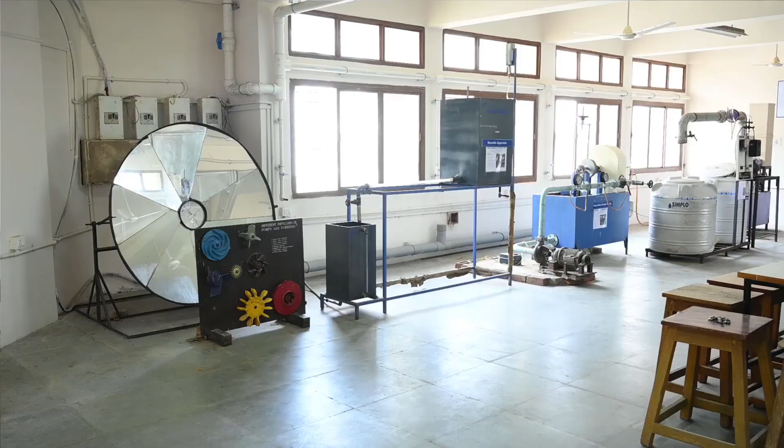This lab works in conjunction with the theory course offered in the 4th semester of Fluid Mechanics and Hydraulic Machines. In the academic years 2017-18 and 18-19, 2 separate subjects were offered to cover the fundamental aspect as well as the application aspect of fluid mechanics and hydraulic machines. In the 4th semester, the fluid mechanics subject was offered, whereas in the 5th semester the application part was covered in fluid power engineering.

Hello everyone, myself Professor P.R. Panchal, Assistant Professor at Mechanical Engineering Department in GEC Modasa. Welcome to the Laboratory of Automobile Engineering. This laboratory is equipped with various types of mechanisms which are used in automobiles.

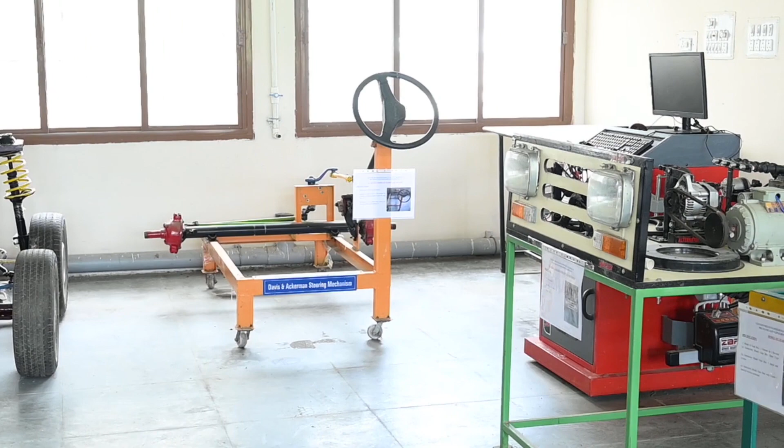Myself, Professor S.P. Patel, Associate Professor, Mechanical Engineering Department. This is an internal combustion engine lab. We have a facility of a single cylinder water cooled diesel engine test rig coupled with an electrical dynamometer, and it is attached with sensors as well as temperature measurement facilities.

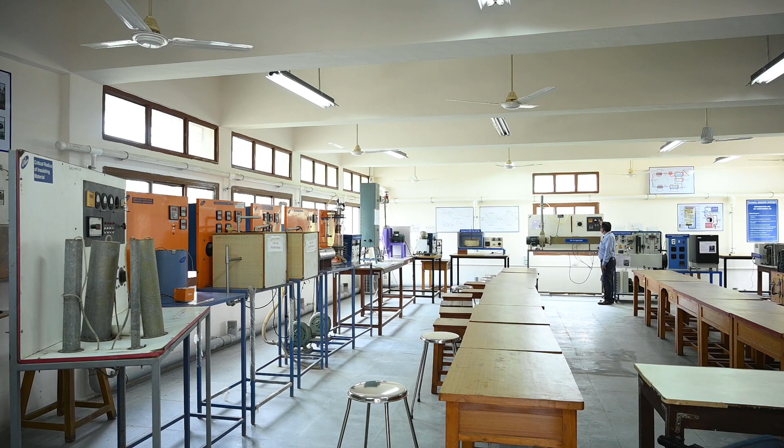Welcome to the Heat Transfer Laboratory. I am Professor R.B. Shah, Assistant Professor in Mechanical Engineering Department at GEC Modasa. This laboratory is equipped with various experimental setups.

Welcome to the Refrigeration and Air Conditioning Lab. Myself, Nisha Bora, Associate Professor in Mechanical Engineering. In our lab we have a few test rigs.

This is a CAD lab in which we have an adequate number of computers available, all connected with internet facility. In all computers we have dedicated software of mechanical engineering like ANSYS and MATLAB installed.

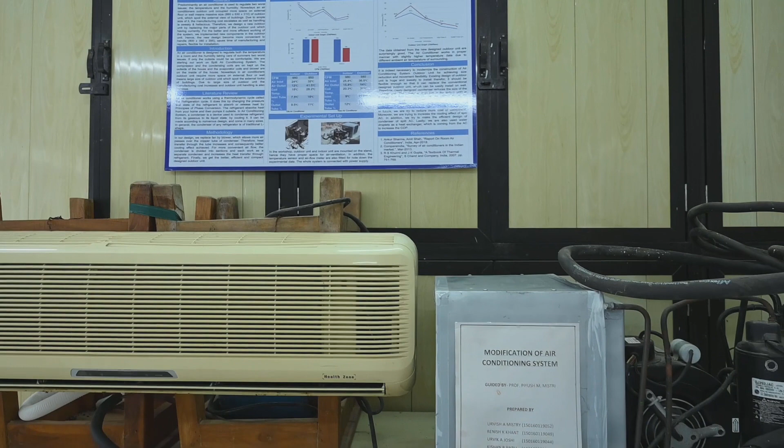Myself, Professor H.I. Chaudhary, working as Assistant Professor in Mechanical Engineering Department at Government Engineering College, Modasa. Welcome to this Material Science and Metallurgy Lab. This course is offered in the third semester of the second year UG program.

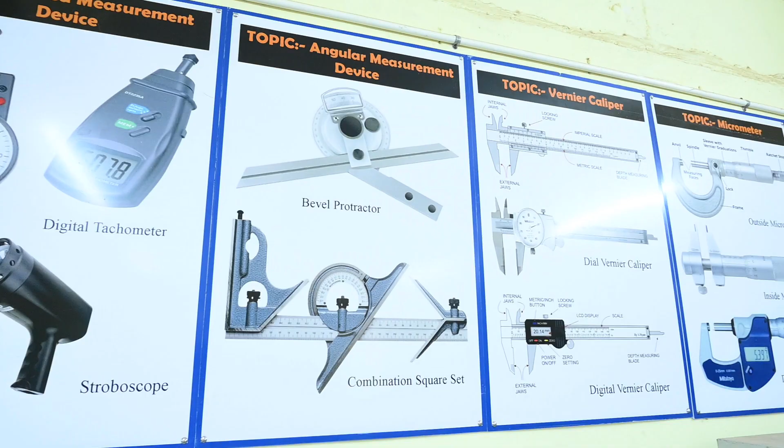In this laboratory we have a major equipment known as the metallurgical microscope. This laboratory is equipped with various measuring instruments used for linear measurement, angular measurement, and velocity measurement. These are some of the devices. This device is a vernier caliper, which is used for linear measurement.

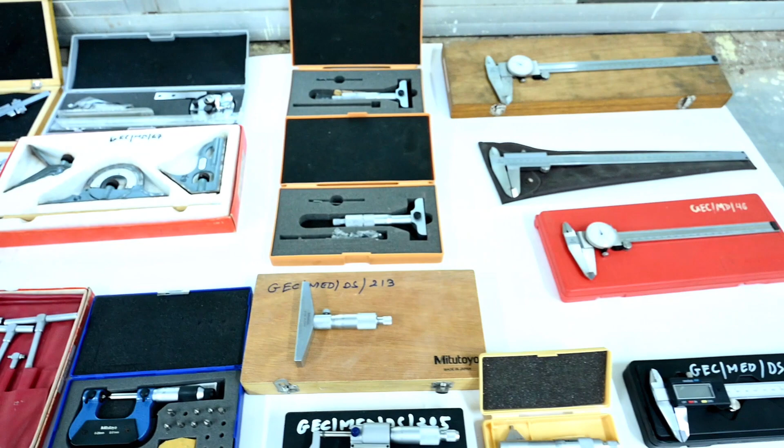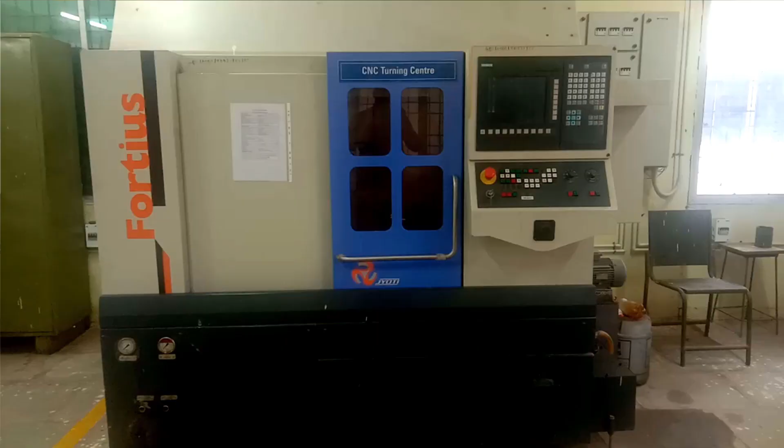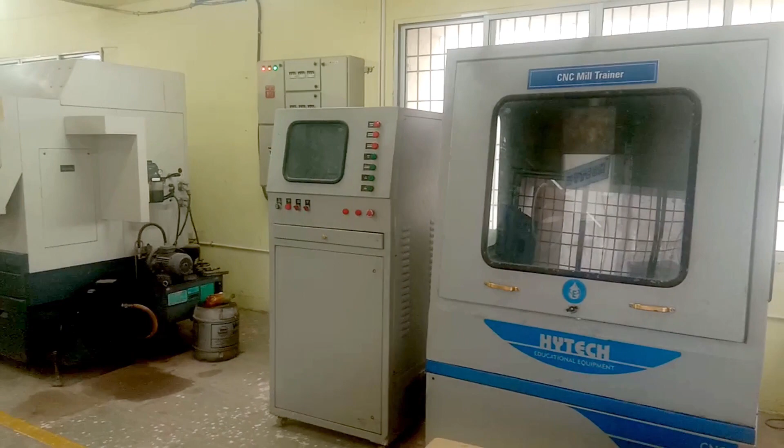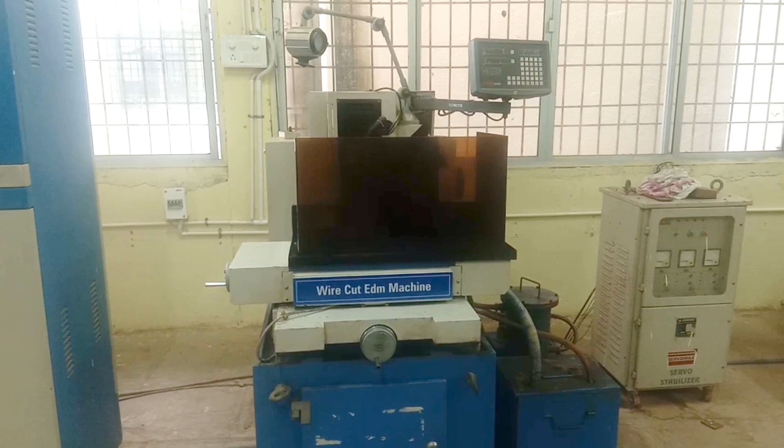Lab facilities include the CNC turning machine, which is Jyoti Make. Second one, mill trainer, VMC mill trainer. Third one is a 5-axis robot. One is the bench drill grinder. Second one is a wire cut EDM machine and the die sinking EDM machine.

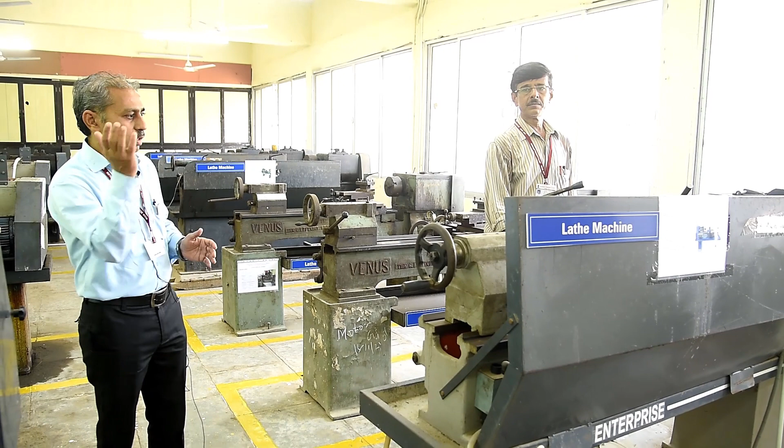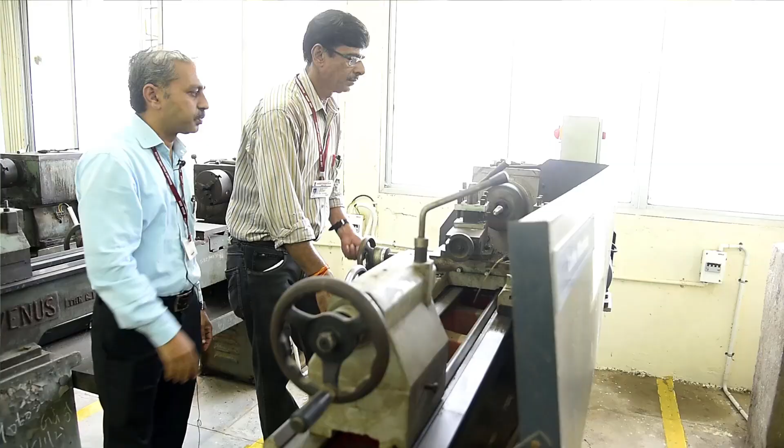This is Manufacturing Process Lab in which a number of conventional machines are available. In this laboratory, 11 lathe machines, 1 knee and column type milling machine, and 4 shaper machines are available, and on these machines a number of operations can be performed.

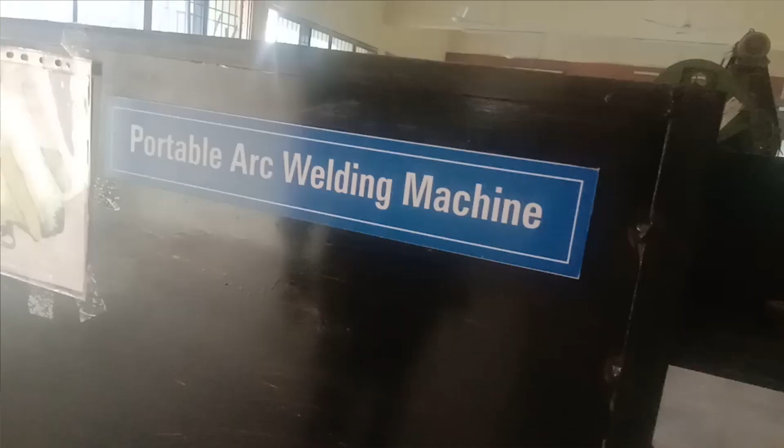Welcome to workshop manufacturing practice in the fitting shop lab. Myself, R.N. Bodar, Assistant Professor in Mechanical Engineering Department. Workshop manufacturing practice is a subject of first year students, and it is common for all branches.

Yes, sir. He is Mr. I.R. Kalaswar, instructor in fitting shop and carpentry shop.

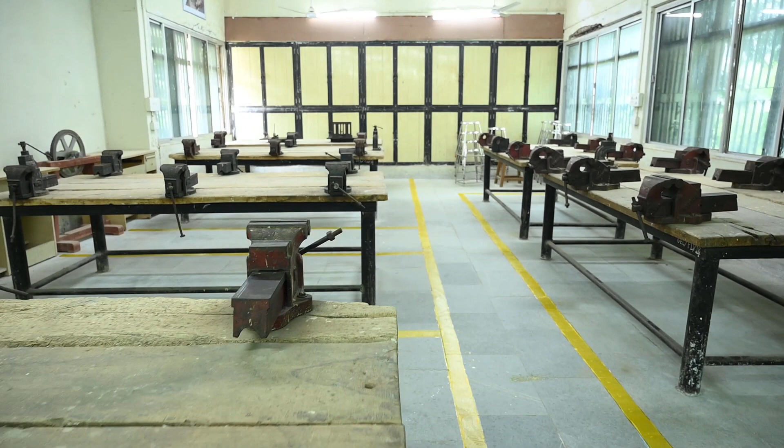Some jobs available here in the carpentry shop are done by students, and this lab has capacity for one batch at a time.

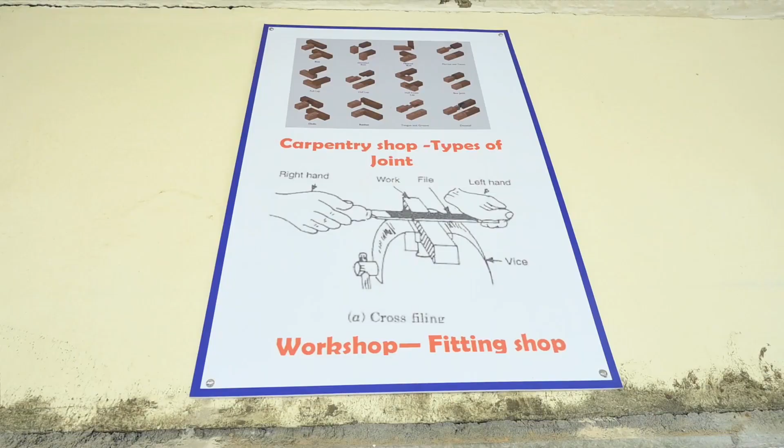Welcome to Engineering Graphics and Design Lab. Myself, Professor J.R. Bhavsar, Assistant Professor in Mechanical Engineering Department. Engineering Graphics and Design subject is offered for first year students, and it is common for all the branches.